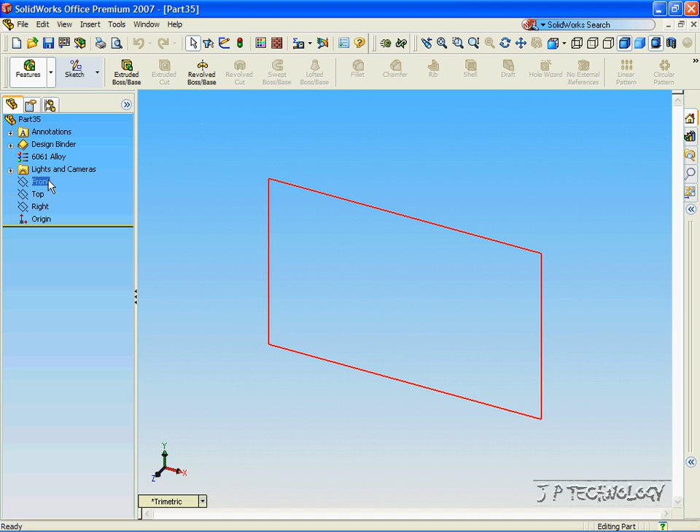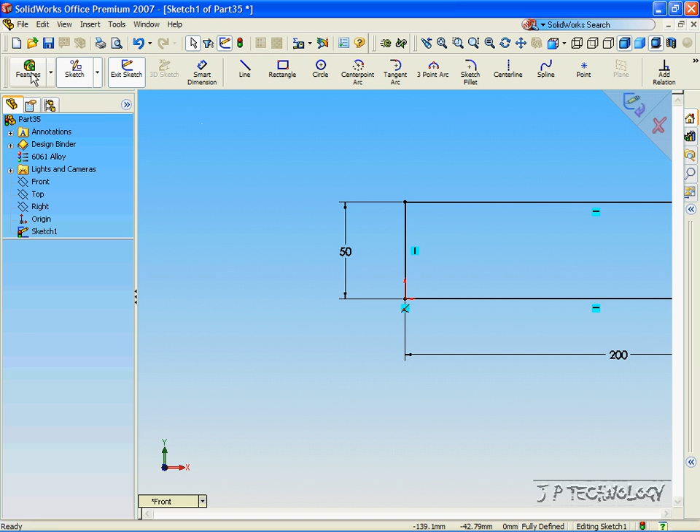Now, we're first going to make a rectangle, so let's click Front, click Sketch, click Rectangle. Now click the origin and a point outside of the origin. Let's dimension this rectangle at 50 by 200. Click OK. Now let's extrude this out, and we'll extrude it out by 20 millimeters. Click OK.

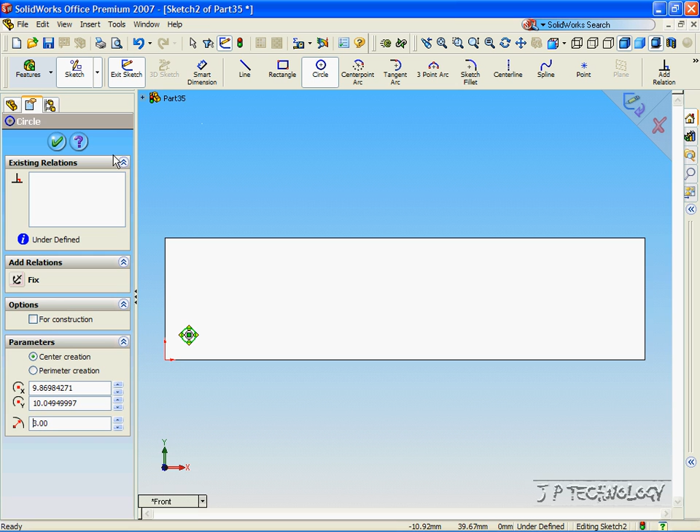Now let's go to the front view and click the front face, and we'll sketch a circle on the front face. So let's sketch a circle with 3 millimeters radius. Using the Smart Dimensioning tool, let's make it 10 millimeters away by 10 millimeters away.

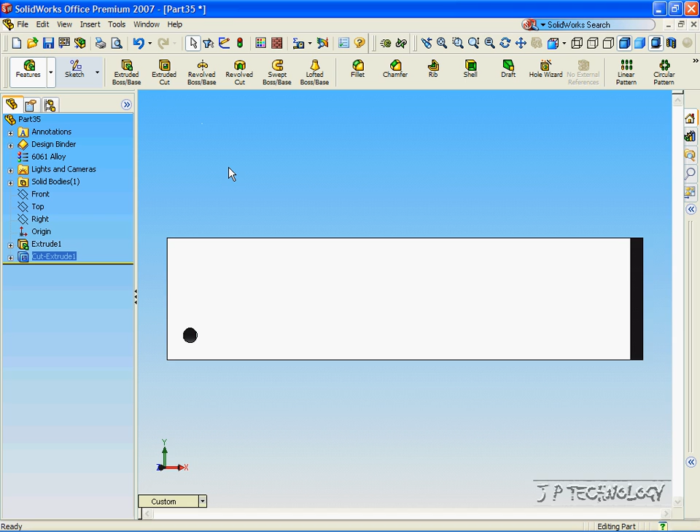Click OK. Now let's cut this circle out. Click Feature, click Cut, click Through All, click OK. So now we've made our feature that we're going to use with the linear pattern.

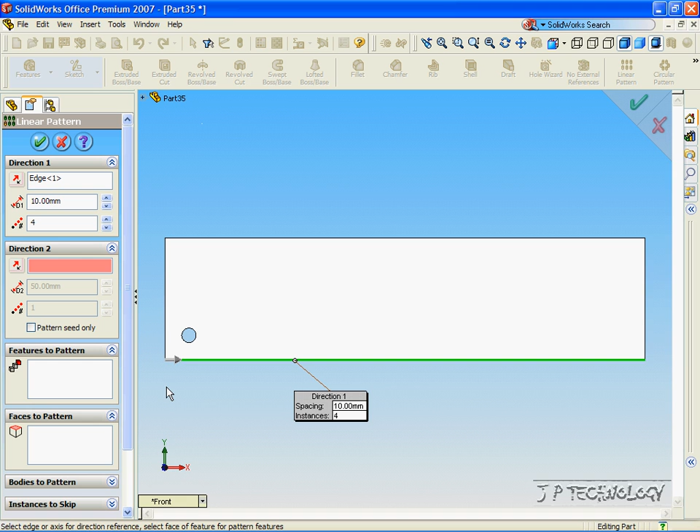Now click Linear Pattern, and the first thing that we have to decide on is the direction that we're going to make the linear pattern. The direction has to be a straight line, and right now we can either make it horizontal or we can make it vertical. For the first one, let's make it horizontal. Now click the Feature to Pattern, and we're going to select the circle. So let's go through our tree and click the Extrude Cut.

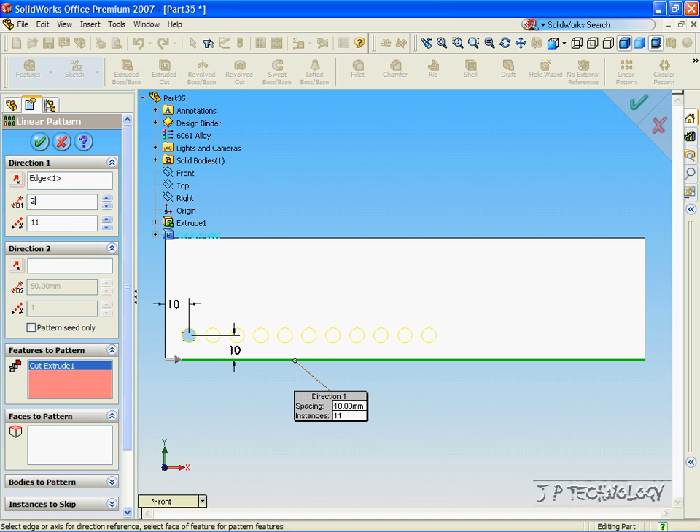And now we have other parameters that we can play with. We can play with the distance in between each circle, and we can play with how many circles we're going to create. So for this, let's make 20 millimeters in between each circle, and let's make 11 circles. Click OK. And now we've made our linear pattern.

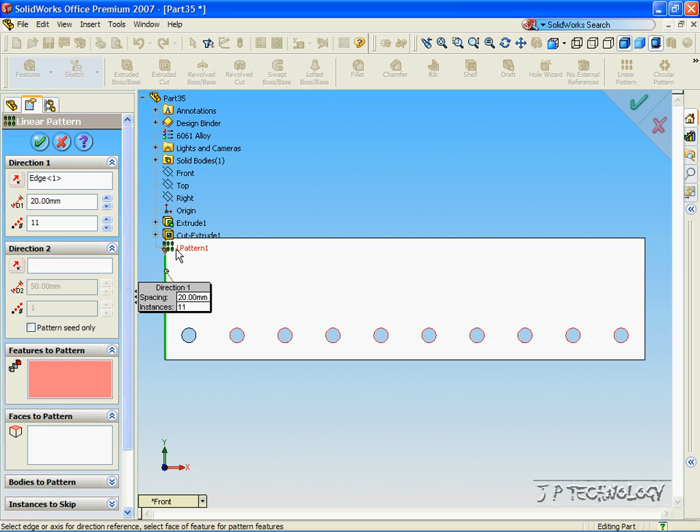Now let's do the same, but make a vertical linear pattern. Click Linear Pattern, click the vertical line, click Features to Pattern, and we'll click the first linear pattern that we made. Now as you can see, the linear pattern is going in the wrong direction, so let's click the reverse direction to get it going in the right one. And let's make 10 millimeters away, and we'll make 4 sets. Click OK, and we've made our linear pattern again.

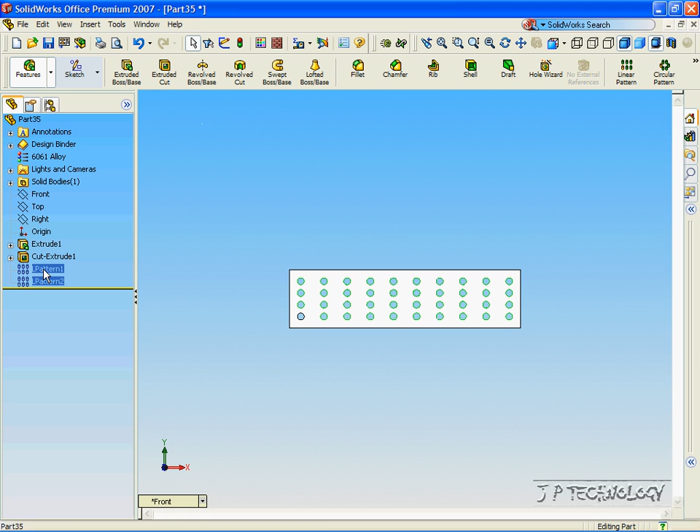Now click Linear Pattern 1, hold down Control, and click Linear Pattern 2, and right click, and let's suppress these 2 linear patterns.

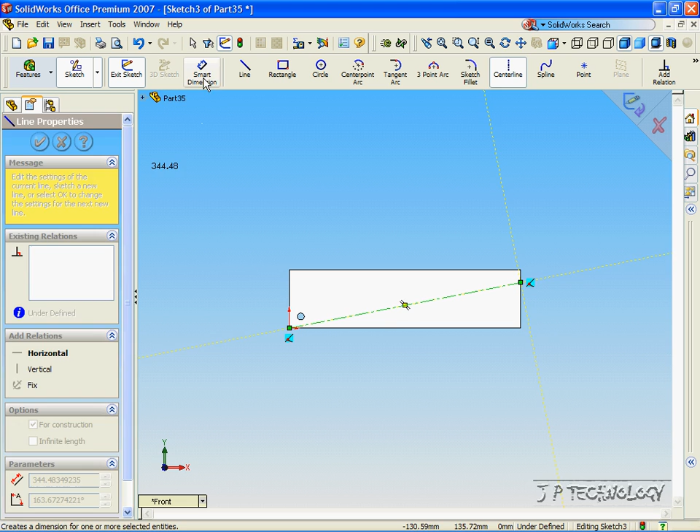Now I'm going to show you that you can make a linear pattern with a line that you put in yourself. So let's click on the front face, click Sketch, click the center line. Now click the point in the corner and click on along this line. With the Smart Dimensioning tool, we're able to either dimension the angle in between the two, or we can dimension the distance in between this point and this point. For this, let's do the angle. So we'll click this line, and let's make the angle 5 degrees.

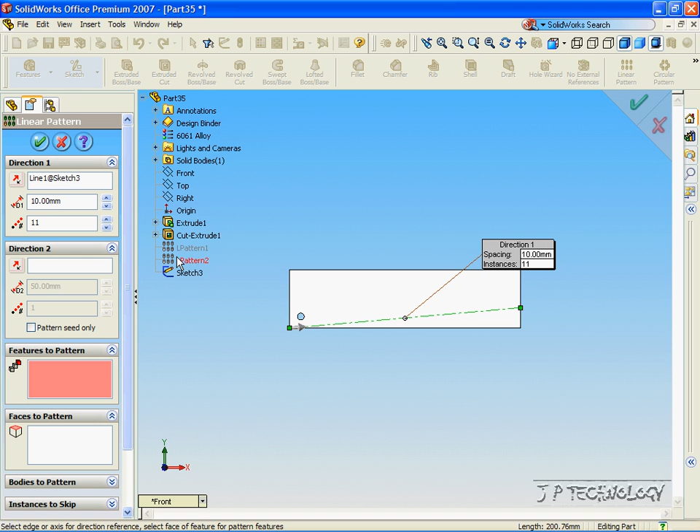Click OK. Now click the linear pattern, click the line that we just made, click the Feature to Pattern, open up the tree, and use the hole that we cut. Now let's make this 20 millimeters with 10 features. Click OK, and now we have it going on an angle.

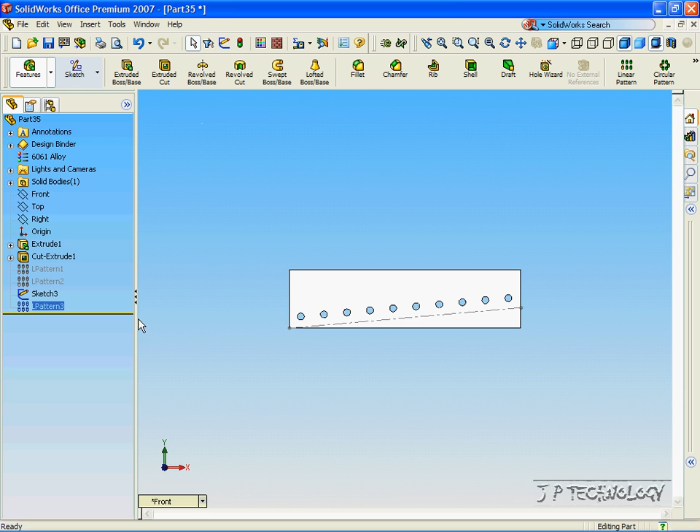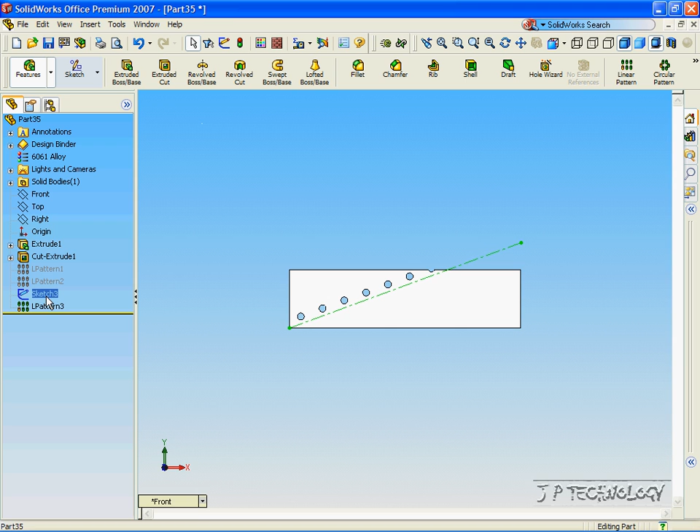Now we can also adjust this angle, and the linear pattern will follow it. So let's right click on the sketch, click Edit Sketch, and let's make this angle 20 degrees. Click OK, click Accept, and now the pattern goes off with those 20 degrees. Now click the sketch, hold Control, and click Linear Pattern 3. Now right click and delete both of them.

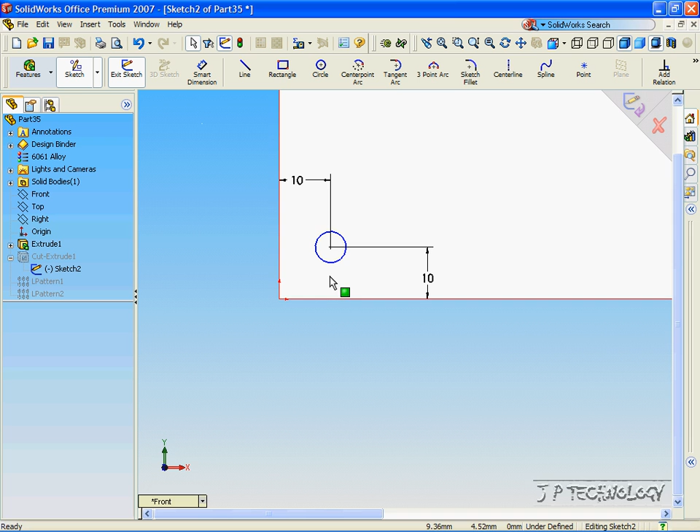Now we're also able to change the initial extruded cut, and it will also influence the linear patterns that we have both suppressed. Now, let's open up the extrude cut, right click the sketch, click Edit Sketch, and let's zoom in. Now let's delete this circle and let's make a square. Now we'll make this square 5 by 5.

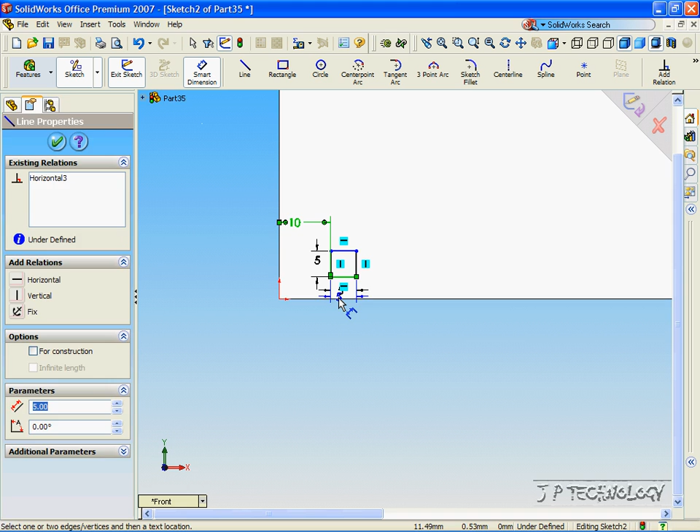And we'll make it 10 millimeters away and 10 millimeters away. Click OK, click Accept. Now when we unsuppress the two linear patterns, they will be squares. So click Linear Pattern 1, hold down Control, click Linear Pattern 2, right click and press Unsuppress, and now our patterns are squares instead of circles.

And this concludes our tutorial on the linear pattern function within SOLIDWORKS.